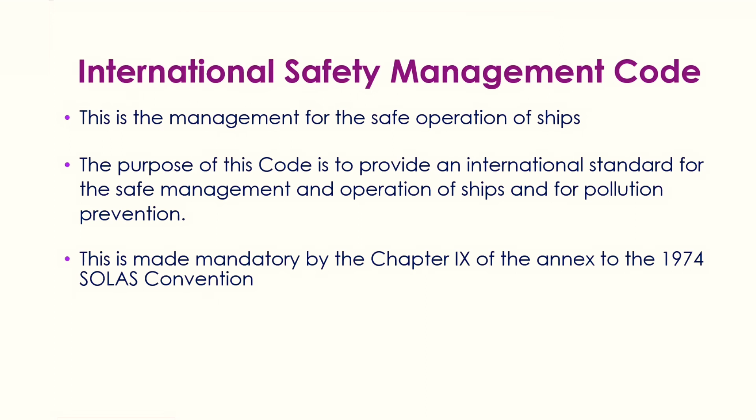ISM Code, Chapter 9 of the Annex to the SOLAS Convention. International Safety Management Code. This is the management for the safe operation of ships. The purpose of this code is to provide an international standard for the safe management and operation of ships and for pollution prevention. This is made mandatory by the Chapter 9 of the Annex to the 1974 SOLAS Convention.

Regulation 1. Definitions. International Safety Management, or ISM Code, means the International Management Code for the safe operation of ships and for pollution prevention.

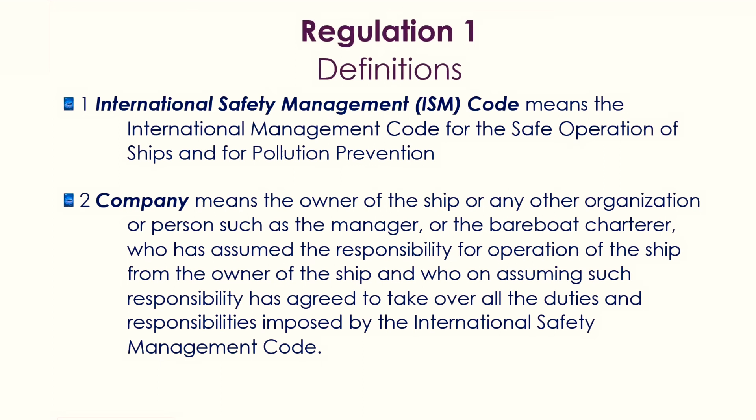2. Company means the owner of the ship or any other organization or person, such as the manager or the bareboat charterer, who has assumed the responsibility for operation of the ship from the owner of the ship and who, on assuming such responsibility, has agreed to take over all the duties and responsibilities imposed by the International Safety Management Code. 3. Oil tanker means a cargo ship constructed or adapted for the carriage in bulk of liquid cargoes of an inflammable nature.

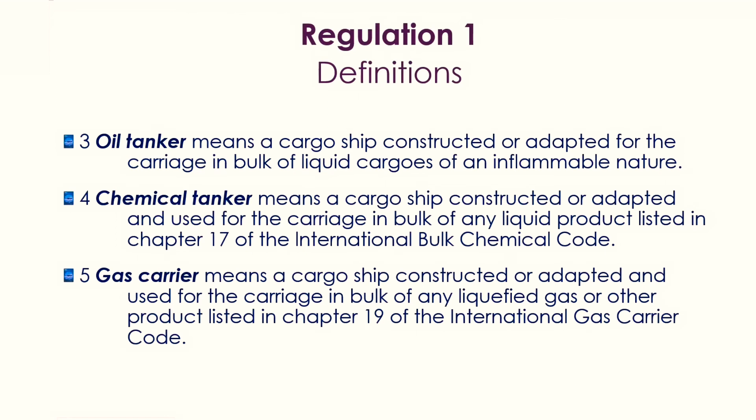4. Chemical tanker means a cargo ship constructed or adapted and used for the carriage in bulk of any liquid product listed in Chapter 17 of the International Bulk Chemical Code. 5. Gas carrier means a cargo ship constructed or adapted and used for the carriage in bulk of any liquefied gas or other products listed in Chapter 19 of the International Gas Carrier Code.

6. Bulk carrier means a ship which is constructed generally with single-deck topside tanks and hopper side tanks in cargo spaces and is intended primarily to carry dry cargo in bulk and includes such types as ore carriers and combination carriers. 7. Mobile Offshore Drilling Unit, or MODU, means a vessel capable of engaging in drilling operations for the exploration for or exploitation of resources beneath the seabed, such as liquid or gaseous hydrocarbons, sulfur, or salt.

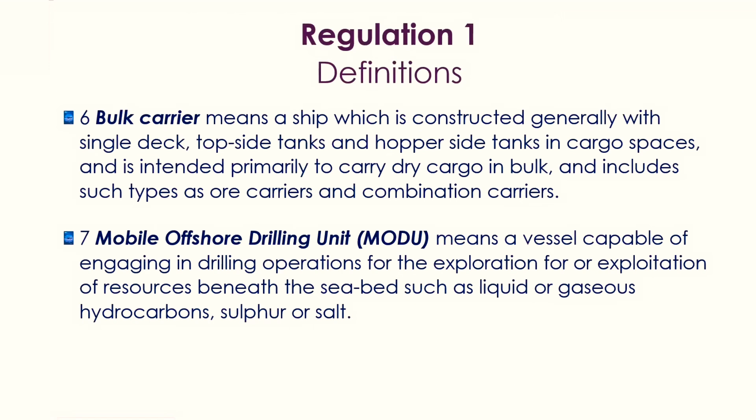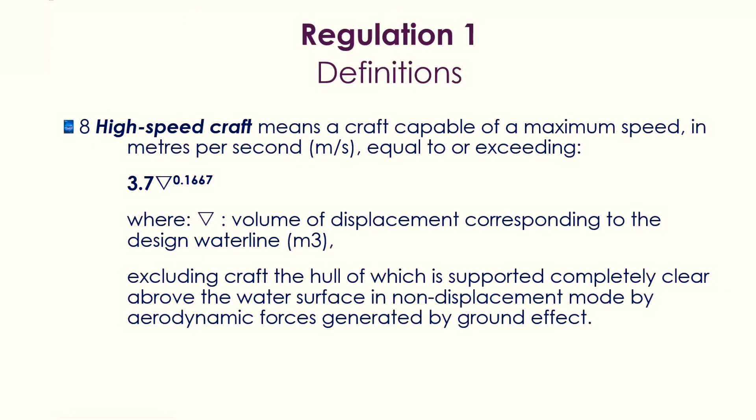8. High-speed craft means a craft capable of a maximum speed in meters per second equal to or exceeding 3.7 delta raised to 0.1667, where delta is the volume of displacement corresponding to the design waterline, excluding craft, the hull of which is supported completely clear above the water surface in non-displacement mode by aerodynamic forces generated by ground effect.

Regulation 2. Application. This chapter applies to ships regardless of the date of construction as follows. 1. Passenger ships including passenger high-speed craft not later than July 1998. 2. Oil tankers, chemical tankers, gas carriers, bulk carriers, and cargo high-speed craft of 500 gross tonnage and upwards, not later than July 1, 1998. And 3. Other cargo ships and mobile offshore drilling units of 500 gross tonnage and upwards, not later than July 1, 2002. This chapter does not apply to government-operated ships used for non-commercial purposes.

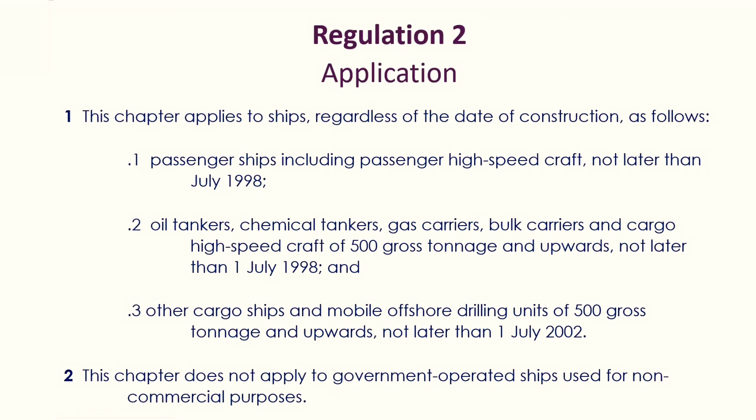Regulation 3. Safety Management Requirements. 1. The company and the ship shall comply with the requirements of the International Safety Management Code. For the purpose of this regulation, the requirements of the code shall be treated as mandatory. 2. The ship shall be operated by a company holding a document of compliance referred to in Regulation 4.

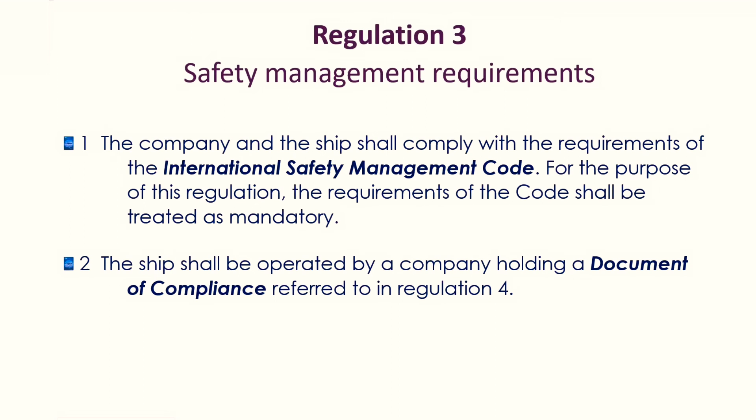Regulation 4. Certification. 1. A document of compliance shall be issued to every company which complies with the requirements of the International Safety Management Code. This document shall be issued by the administration, by an organization recognized by the administration, or at the request of the administration by another contracting government. 2. A copy of the document of compliance shall be kept on board the ship, in order that the master can produce it on request for verification.

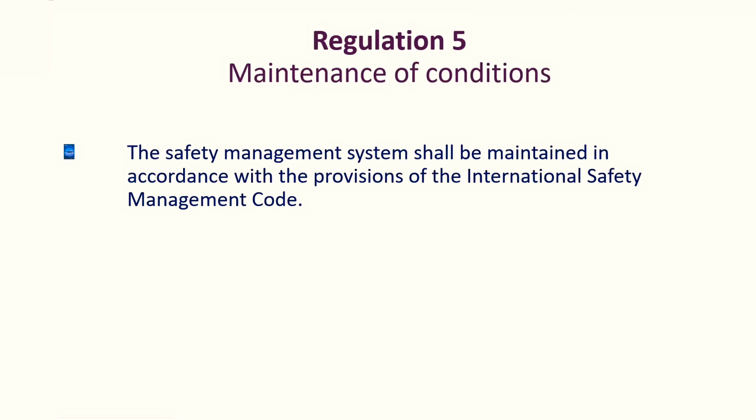3. A certificate, called a Safety Management Certificate, shall be issued to every ship by the administration or an organization recognized by the administration. The administration or organization recognized by it shall, before issuing the Safety Management Certificate, verify that the company and its shipboard management operate in accordance with the approved safety management system. Regulation 5. Maintenance of conditions. The safety management system shall be maintained in accordance with the provisions of the International Safety Management Code.

Regulation 6. Verification and control. 1. The administration, another contracting government at the request of the administration, or an organization recognized by the administration, shall periodically verify the proper functioning of the ship's safety management system. 2. A ship required to hold a certificate issued pursuant to the provisions of Regulation 4.3 shall be subject to control in accordance with the provisions of Regulation XI/4. For this purpose, such certificate shall be treated as a certificate issued under Regulation I/12 or I/13.

Parts of the ISM. Part A, Implementation, and Part B, Certification and Verification. Part A, Implementation. 1. General. 1.1. Definitions. The following definitions apply to Parts A and B of this code. 1.1.1 International Safety Management or ISM Code means the International Management Code for the safe operation of ships and for pollution prevention, as adopted by the Assembly, as may be amended by the organization.

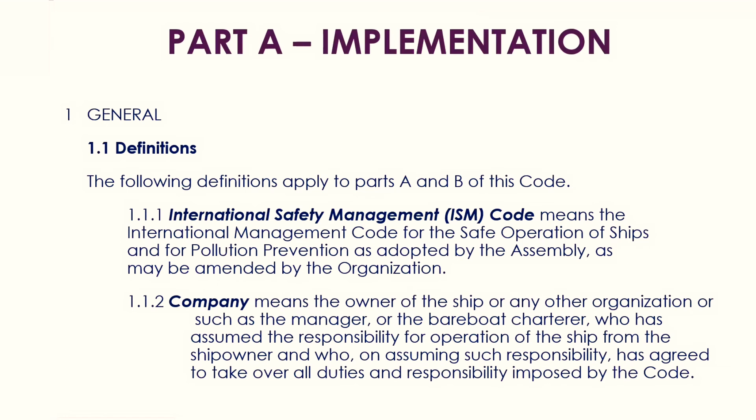1.1.3 Administration means the government of the state whose flag the ship is entitled to fly. 1.1.4 Safety Management System means a structured and documented system enabling company personnel to implement effectively the company's safety and environmental protection policy.

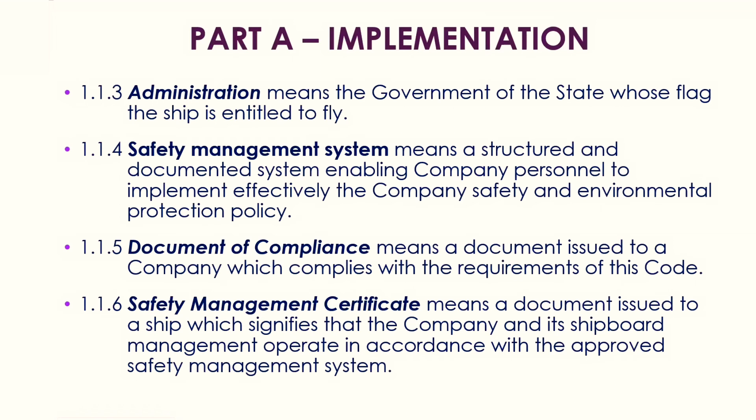1.1.5 Document of Compliance means a document issued to a company which complies with the requirements of this code. 1.1.6 Safety Management Certificate means a document issued to a ship which signifies that the company and its shipboard management operate in accordance with the approved safety management system.

1.1.7 Objective evidence means quantitative or qualitative information, records, or statements of fact pertaining to safety or to the existence and implementation of a safety management system element which is based on observation, measurement, or test and which can be verified. 1.1.8 Observation means a statement of fact made during a safety management audit and substantiated by objective evidence.

1.1.9 Non-conformity means an observed situation where objective evidence indicates the non-fulfillment of a specified requirement. 1.1.10 Major non-conformity means an identifiable deviation that poses a serious threat to the safety of personnel or the ship, or a serious risk to the environment that requires immediate corrective action, or the lack of effective and systematic implementation of a requirement of this code.

1.1.11 Anniversary date means the day and month of each year that corresponds to the date of expiry of the relevant document or certificate. 1.1.12 Convention means the International Convention for the Safety of Life at Sea, 1974 as amended.

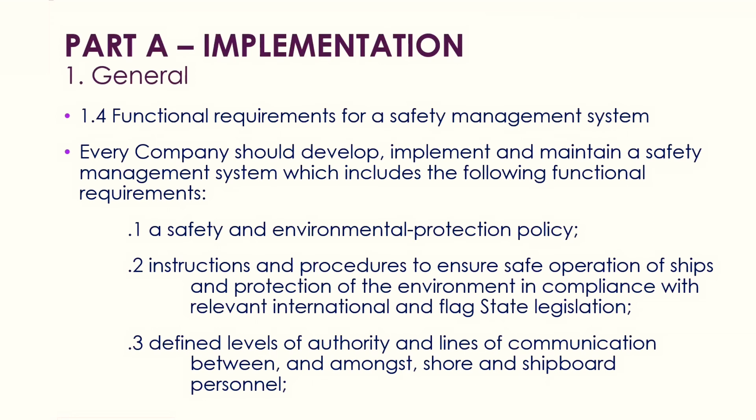4. Procedures for reporting accidents and non-conformities with the provisions of this code. 5. Procedures to prepare for and respond to emergency situations. And 6. Procedures for internal audits and management reviews.

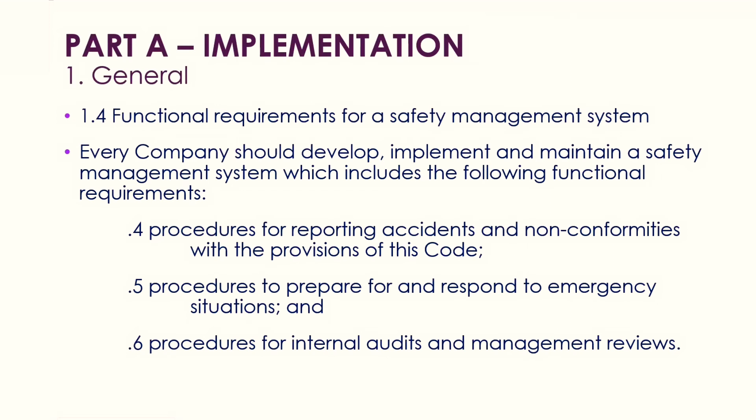2. Safety and environmental protection policy. 2.1 The company should establish a safety and environmental protection policy which describes how the objectives given in paragraph 1.2 will be achieved. 2.2 The company should ensure that the policy is implemented and maintained at all levels of the organization, both ship-based and shore-based.

3. Company responsibilities and authority. 3.1 If the entity who is responsible for the operation of the ship is other than the owner, the owner must report the full name and details of such entity to the administration. 3.2 The company should define and document the responsibility, authority, and interrelation of all personnel who manage, perform, and verify work relating to and affecting safety and pollution prevention.

3.3 The company is responsible for ensuring that adequate resources and shore-based support are provided to enable the designated person or persons to carry out their functions. 4. Designated persons, or DP, or designated person ashore, or DPA.

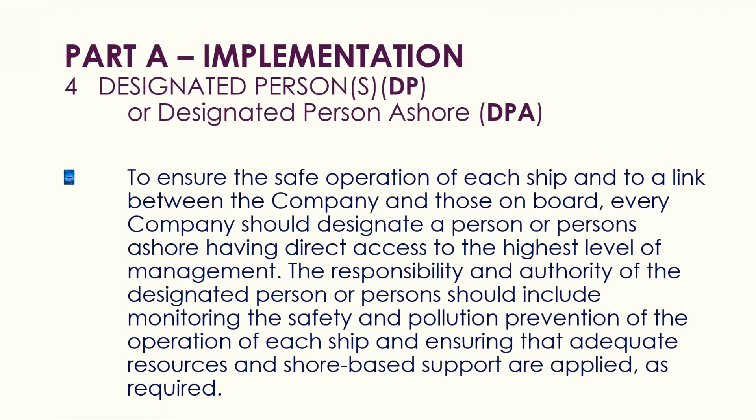5. Master's responsibility and authority. 5.1 The company should clearly define and document the master's responsibility with regard to: 1. Implementing the safety and environmental protection policy of the company. 2. Motivating the crew in the observation of that policy. 3. Issuing appropriate orders and instructions in a clear and simple manner. 4. Verifying that specified requirements are observed. And 5. Periodically reviewing the safety management system and reporting its deficiencies to the shore-based management.

5.2 The company should ensure that the safety management system operating on board the ship contains a clear statement emphasizing the master's authority. The company should establish in the safety management system that the master has the overriding authority and the responsibility to make decisions with respect to safety and pollution prevention and to request the company's assistance as may be necessary.

6. Resources and personnel. 6.1 The company should ensure that the master is: 1. Properly qualified for command. 2. Fully conversant with the company's safety management system. And 3. Given the necessary support so that the master's duties can be safely performed.

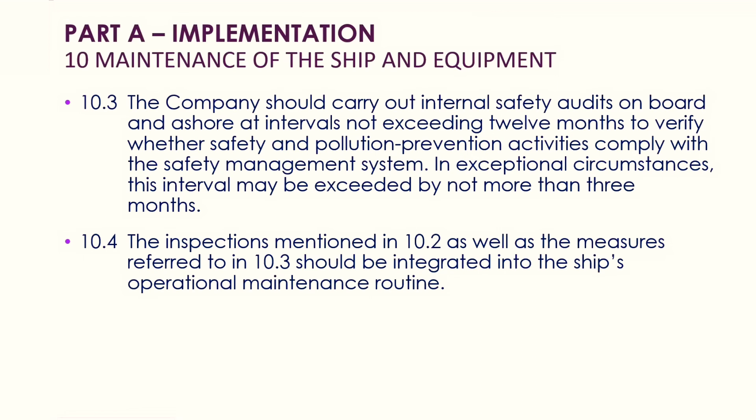11. Documentation. 11.1. The company should establish and maintain procedures to control all documents and data which are relevant to the safety management system. 11.2. The company should ensure that 1. valid documents are available at all relevant locations; 2. changes to documents are reviewed and approved by authorized personnel; and 3. obsolete documents are promptly removed.

11.3. The documents used to describe and implement the safety management system may be referred to as the Safety Management Manual. Documentation should be kept in a form that the company considers most effective. Each ship should carry on board all documentation relevant to that ship.

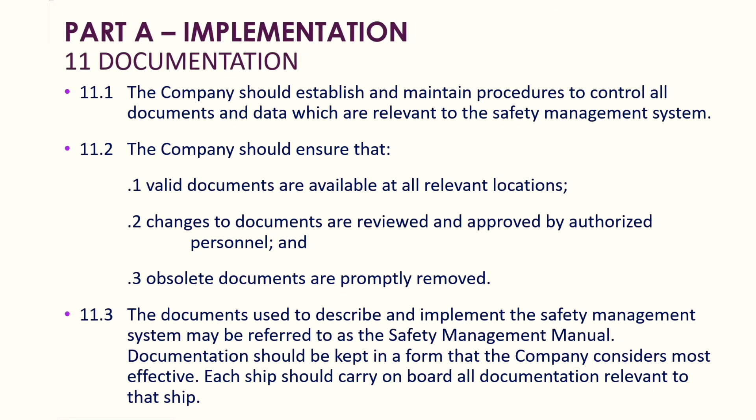12. Company verification, review, and evaluation. 12.1. The company should carry out internal safety audits on board and ashore at intervals not exceeding 12 months to verify whether safety and pollution prevention activities comply with the safety management system. In exceptional circumstances, this interval may be exceeded by not more than 3 months.

12.2. The company should periodically verify whether all those undertaking delegated ISM-related tasks are acting in conformity with the company's responsibilities under the code. 12.3. The company should periodically evaluate effectiveness of the safety management system in accordance with procedures established by the company. 12.4. The audits and possible corrective actions should be carried out in accordance with documented procedures.

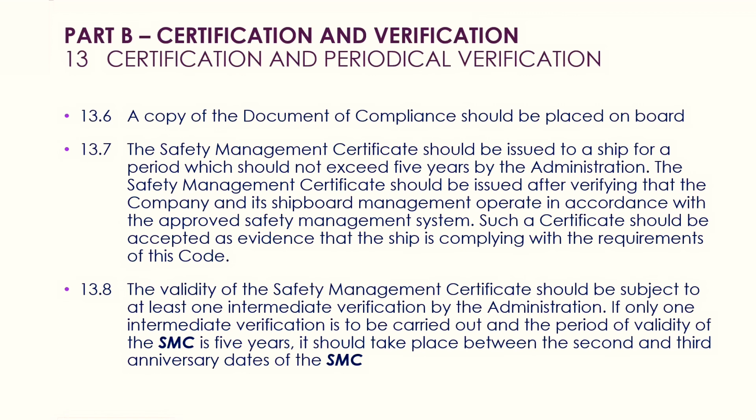13.8. The validity of the safety management certificate should be subject to at least one intermediate verification by the administration. If only one intermediate verification is to be carried out and the period of validity of the SMC is 5 years, it should take place between the 2nd and 3rd anniversary dates of the SMC.

13.9. In addition to the requirements of paragraph 13.5.1, the safety management certificate should be withdrawn by the administration when the intermediate verification required in paragraph 13.8 is not requested or if there is evidence of major nonconformity with this code.

13.10. Notwithstanding the requirements of paragraphs 13.2 and 13.7, when the renewal verification is completed within 3 months before the expiry date of the existing document of compliance or safety management certificate, the new document of compliance or the new safety management certificate should be valid from the date of completion of the renewal verification for a period not exceeding 5 years from the date of expiry of the existing document of compliance or safety management certificate.

13.11. When the renewal verification is completed more than 3 months before the expiry date of the existing document of compliance or safety management certificate, the new document of compliance or safety management certificate should be valid from the date of completion of the renewal verification for a period not exceeding 5 years from the date of completion of the renewal verification.

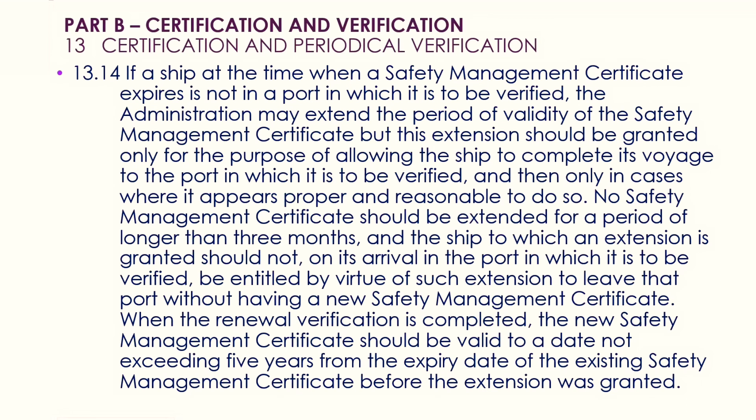14. Interim certification. 14.1. An interim document of compliance may be issued to facilitate initial implementation of this code when 1. a company is newly established, or 2. new ship types are to be added to an existing document of compliance. 14.2. An interim safety management certificate may be issued 1. to new ships on delivery, 2. when a company takes on responsibility for the operation of a ship which is new to the company, or 3. when a ship changes flag.